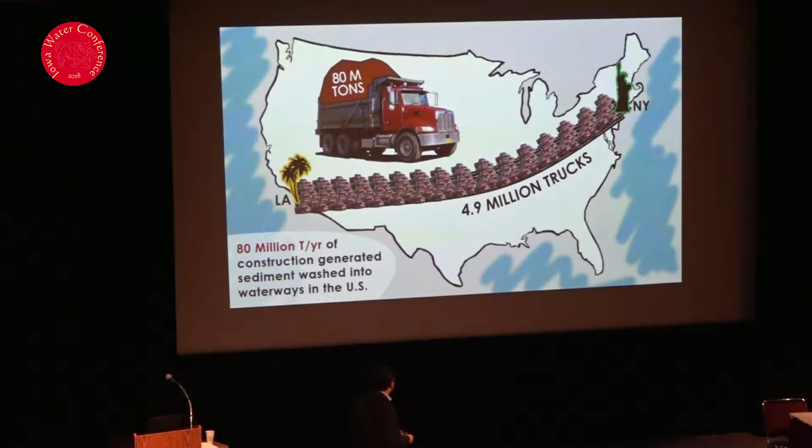Background, when we talk about erosion and sediment control here in the country, we have an estimate of 80 million tons of sediment that gets washed into our waterways each year, and this is just from construction sites. To put that into perspective, it's a huge number. 80 million tons would fill enough dump trucks to fill 9 lanes of highway between LA and New York. Try to picture that. It's a huge amount of soil, and obviously it has a huge impact on our natural ecosystems.

So in order to mitigate the issues related to erosion and sediment loss, we employ several different types of best management practices on construction sites to try to keep that soil in place and catch it before it leaves the site. Today I'll talk about a series of different practices we investigated in our research studies, but these are just a sampling of typical practices you'd see on a construction site. You have practices that go along channels, sediment basins designed to detain stormwater, inlet protection, perimeter controls, and they all have different ideas or ways of performing.

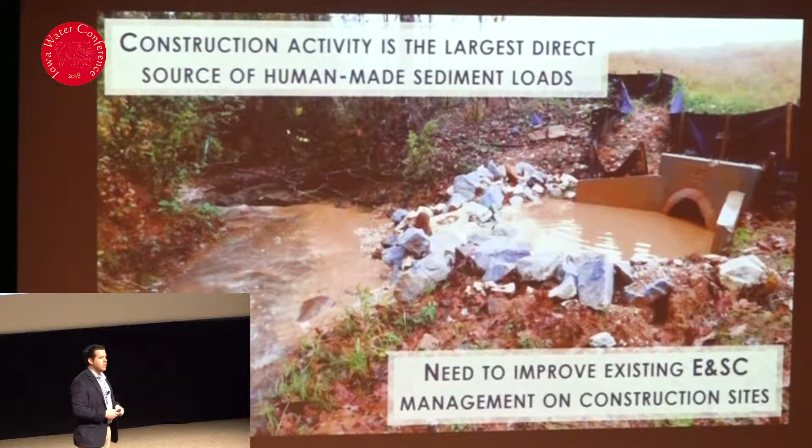However, even with these best management practices employed, we still have sediment-laden discharge that comes off of our sites, and you can imagine what kind of impact that has on the natural ecosystem in that waterway. In Alabama, our rivers literally turn orange after a rain event. So imagine anything trying to survive in that water after significant runoff. There's a need to improve the controls, the temporary practices used on construction sites.

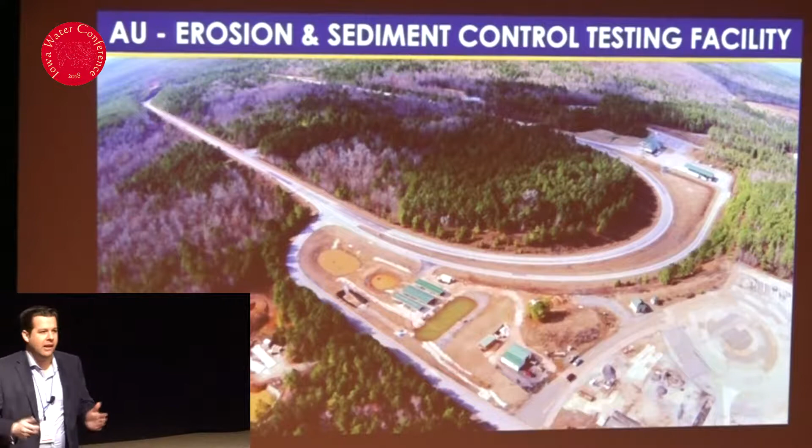At Auburn, we've got a really neat testing facility that we developed over the years. It's housed at the National Center for Asphalt Technology, NCAT, which is a unique world-class facility. It's a 1.7-mile oval test track, and what they do is accelerated pavement performance testing. They've got the test track broken up into different sections, and they run super weighted tractor trailers in circles for 18 hours a day.

At that facility, we've got about 2 acres dedicated to stormwater testing. We call it the Auburn University Erosion and Sediment Control Test Facility. The test facility was developed in collaboration with the DOT as they were trying to improve the practices they use on their construction sites.

The way the facility works is that we have this parking area up here for the asphalt test facility, and that collects stormwater and drains into this upper storage pond. We use that pond to pump flow into our different test apparatus, and that all gets treated in the sediment basin before being detained in our lower detention basin.

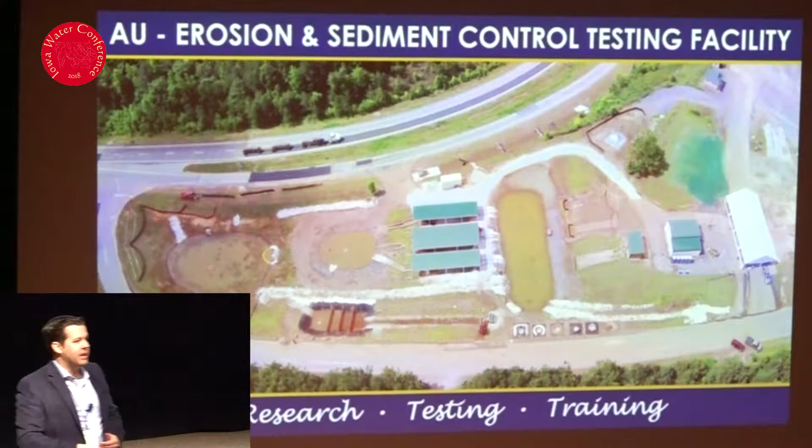Over the years, we've developed several different research apparatuses at the facility, looking at sediment barriers, erosion control blankets, channel testing, sediment basin testing, and skimmer testing. In addition to all of that, we also have demonstration areas we use for training. Every year we host live training events out at the facility to get contractors, developers, and inspectors all up to speed on how to properly manage stormwater on construction sites.

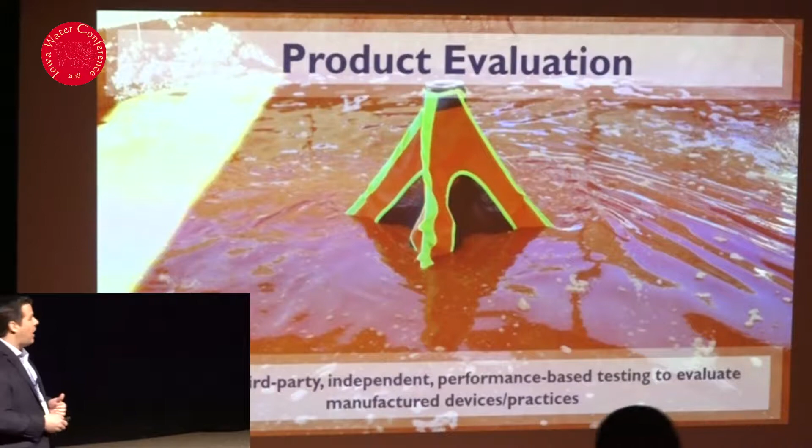So our 3 main areas are research. We also have product evaluation for products trying to get on the DOT's qualified product list. And then we also do the training, our hands-on training.

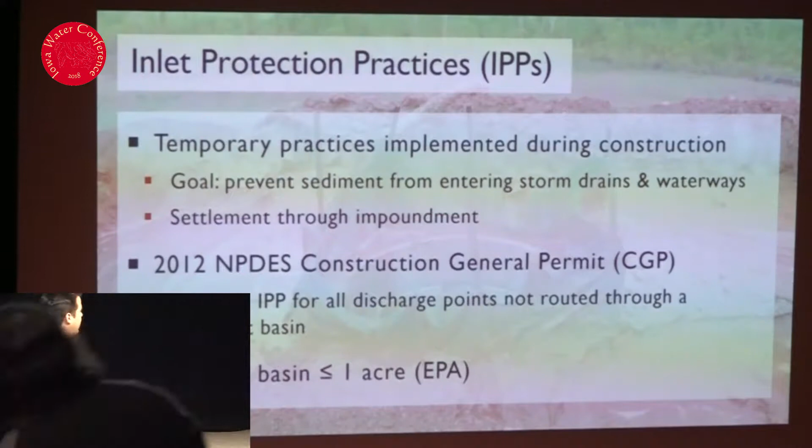The first project I'm going to talk about is one I worked on during my master's, where we looked at inlet protection practices and how to improve them to retain sediment around storm drain inlets. Inlet protection practices are required for all inlets that are not routed through a sediment basin. The idea is that you are impounding stormwater around the outside of the inlet and allowing soil particles to fall out through gravity.

Typically, the drainage area for these inlet protection practices is limited to 1 acre, so you shouldn't use them if you have more than 1 acre draining into the barrier. These are some of the common practices we looked at: silt fence, sandbags, wattles, straw-filled wattles, aggregate barriers, and we also looked at some manufactured products that have become popular in the industry.

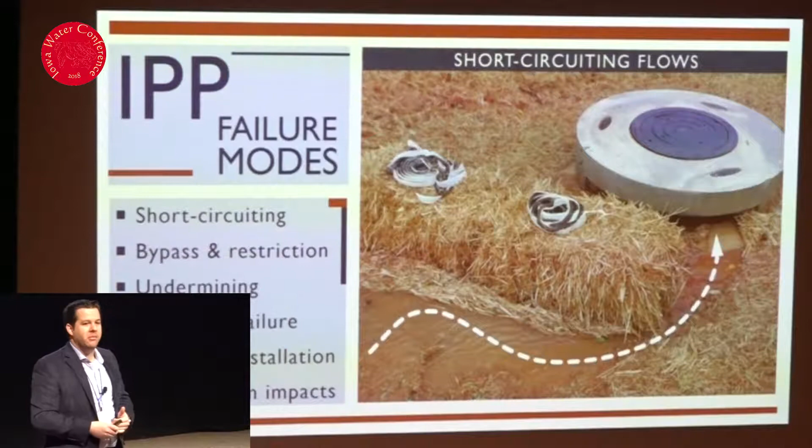These practices and products have a lot of different failure mechanisms. A lot of them have to do with the way they were installed. We deal with things such as short-circuiting, bypass around the practice if it's not properly installed, and undermining is very common. Structural failure is also due to poor maintenance and poor installation, and then there's improper installation, where the practice wasn't even trenched in. It just becomes erosion control theater, I like to call it.

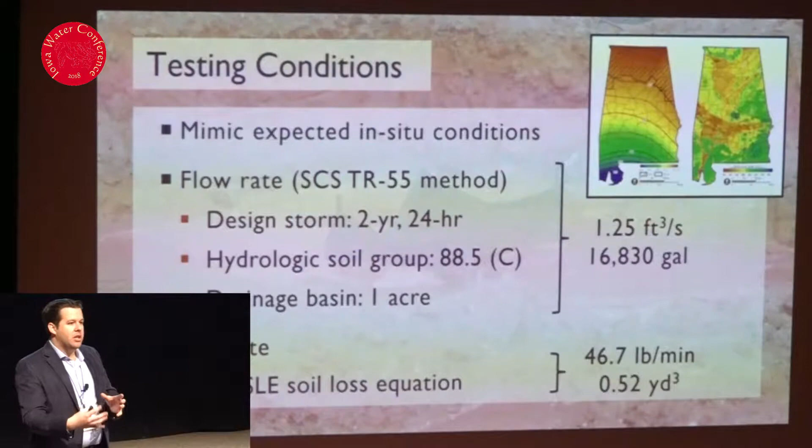In all of our testing, what we're trying to do is replicate field-like conditions. So we do a hydrologic analysis, a soil analysis, we look at our curve numbers, conduct a TR55 analysis, look at universal soil loss, and come up with a testing regime that mimics what these practices would be subjected to out in the real world.

So for this particular test, we were testing at 1.25 cubic feet per second for a duration of 30 minutes, and then we're introducing soil as well.

So we installed a test channel to mimic a highway median. It's 40 feet long, 20 feet wide. We've got a section that's plated in steel just to allow our flow to equalize and minimize erosion in that area. But then on the bottom half of the installation, we've got just a bare earthen soil area where we can install a practice the same way it'd be installed out in the field.

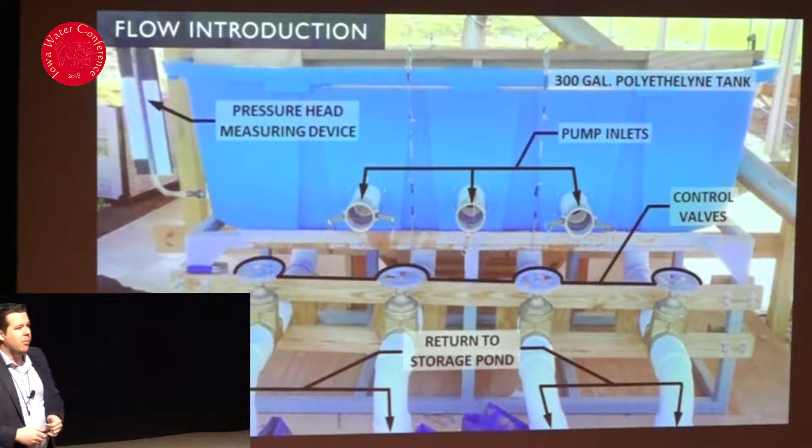We introduce flow into the system using a regulated system that we've come up with where we can control the amount of flow coming into the test apparatus, and then we auger in soil and meter it in at the rate that would be expected, the soil loss expected on the site.

We collected as much data as we could during these tests. We're looking at flow rates, water quality, taking grab samples upstream and downstream. We conducted surveys of the entire test apparatus before and after a test so we can account for how much sediment was collected and deposited upstream of the system. You can see the surveying here using a robotic total station.

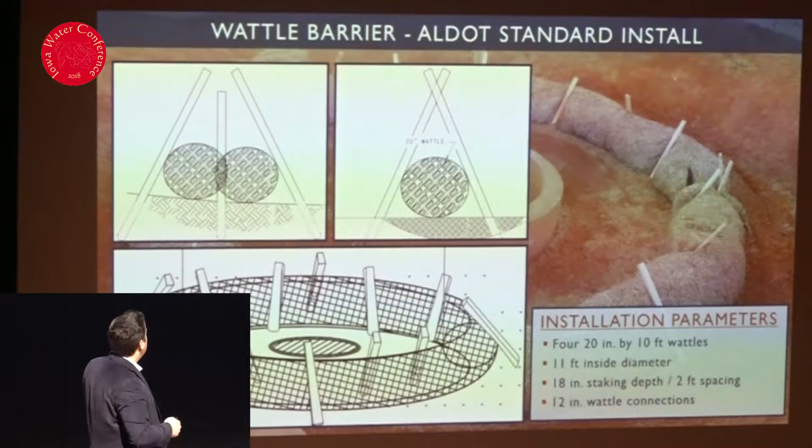And then we start improving practices. The way we went about this was that we would take the DOT's standard installation, test it to see how well it did, and then try to provide improvements if there were improvements that could be made. So this first installation here is a straw wattle barrier. It's constructed in a ring around the inlet, and you can see the standard DOT details here. Basically it uses a 20-inch wattle, installed around and overlapped about 12 inches, and then we use tee-pee staking to hold it down and secure it in place.

So this is a time-lapse video during testing. A couple things to point out here: these practices are intended to impound water outside of the practice or outside of the barrier. You can see there's very little impoundment occurring here, and you actually see a lot of that water flowing underneath the practice. If you look closely, you can see that wattle is buoyant, so the majority of the water is not flowing through, it's not flowing over, it's flowing underneath.

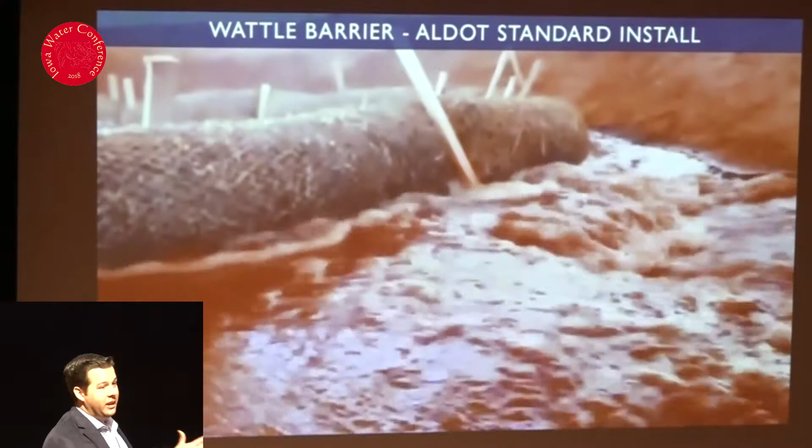So we looked at ways of trying to improve this, and we went through several different iterations, and this is the one that ended up working out best for us. Basically what we did was reduce the diameter of that wattle barrier and add a geotextile underlay. That underlay was to help reduce the amount of erosion and scour occurring under the practice.

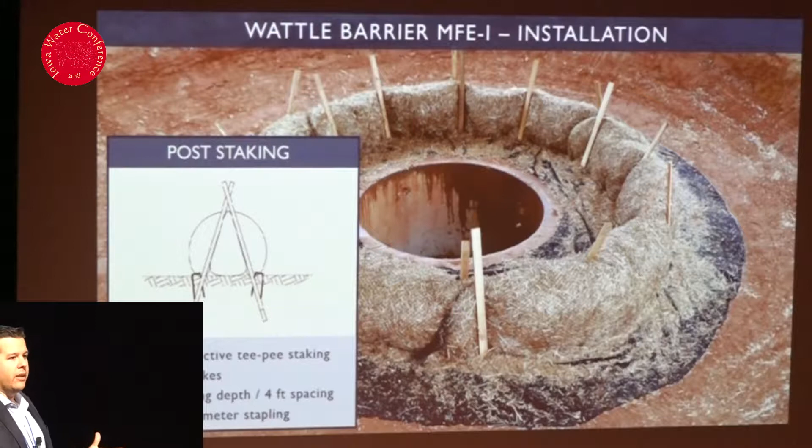So we reduced the diameter, and we increased our wattle connections. We were seeing a lot of short circuiting where water was flowing in between the wattles, so we increased the length of those to 18 inches. We also modified our staking pattern, where we're still using the tee-pee staking style - we call it a non-destructive method, we're not piercing the product - but then we also add these staples, on both the inside and outside of the barrier every 10 inches.

And what we saw was that with the staples, we were able to impound a lot more water outside of the practice and actually get it to overtop. You can see here that's our schematic that we came up with. We've got that 8-ounce geotextile underneath, and it's pinned all the way around, and then the installation is staked and stapled down.

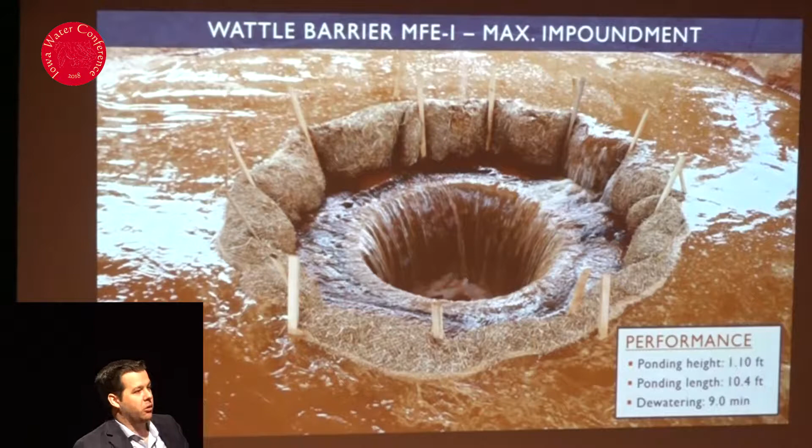One thing I did want to point out is that you don't see much flow actually going through the wattle. So don't think of these systems as filters. What they are is they create an impoundment, and that's where you get your treatment. It's those particles falling out of suspension by that reduced flow, reduced velocity.

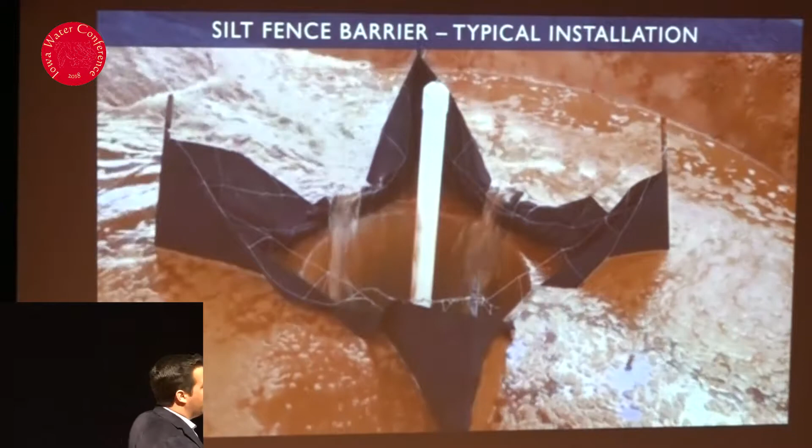Next, we looked at silt fence barriers. We installed it using the typical ALDOT installation method, a 6x6 inch trench. They use a wire-backed type silt fence, non-woven. We tested it out, and 2 minutes into our 30-minute test, this is what we get, which is actually pretty typical if you walk around construction sites and look at some of these barriers after a storm event. This is what ends up happening.

So we figured, okay, this is an easy fix. We'll just add more posts, right? So we added 4 more posts to the system, and 5 minutes in, we get total failure.

So we came up with a way where we had to actually stabilize and reinforce those posts a little better. We ended up doing that with 2x4s. This is after a series of maybe 5 or 6 different tests where we tried different materials, different post types, different configurations, and this is what ended up working out the best.

You can see here we're still using the steel T-post. We've included an underlay to reduce the amount of scour underneath. And then we've got this unique dewatering board here, which I'll show you a little bit more in a minute.

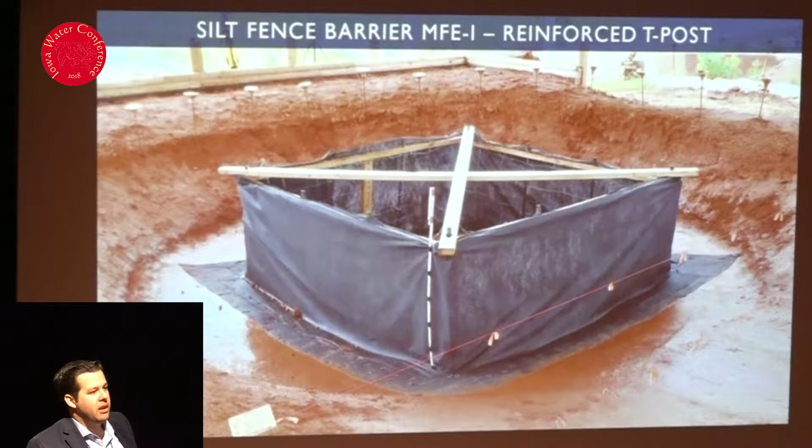Something neat about this installation with this cross bracing with this underlay is that now we can't trench in our silt fence. So instead of trenching it in, we pinned it. Here's a close-up on that. Every 5 inches, we put a sod pin. They're 6 inches deep, real easy to drive into the ground. Actually, the installation was a lot easier than creating that trench and burying our fabric underneath.

And then here's our dewatering board. This practice performed so well that we had impoundment around the barrier for more than 24 hours. So we had to come up with a way of safely discharging in a controlled manner some of that water that was impounded. You can see here during our time lapse, you don't see any deflection on the structure. From a structural standpoint, it performs very well. And then we're able to dewater that entire impounded area within 24 hours using that dewatering board in the back.

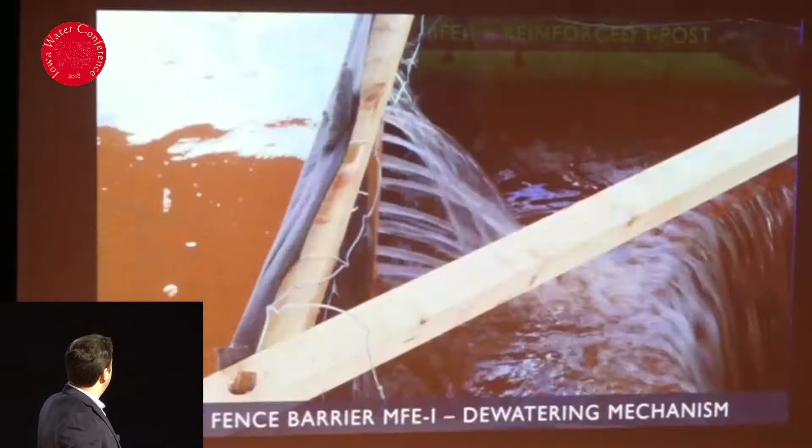Here's kind of a close-up looking at the dewatering board. And here it is after a series of tests. You can see a significant amount of sediment has dropped out back here.

One of the neat things that we saw with this practice was that you create such a large impoundment that sediment starts to settle out way upstream of the practice, to where you're not having a whole lot of maintenance right at the edge of the barrier. So it makes it easier from a maintenance standpoint.

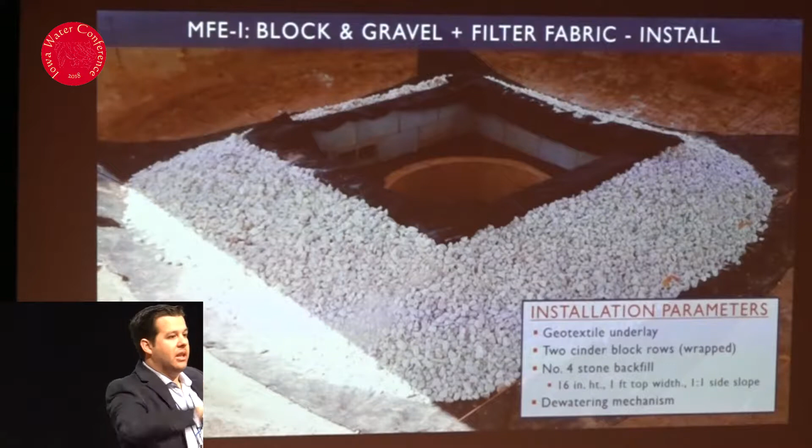We looked at aggregate barriers. This is a modified block and gravel system we came up with. We've got cinder blocks laid in a square pattern on top of a geotextile, and then we have a geotextile that's actually wrapped around the blocks as well, backfilled with number 4 stone. And then we have a dewatering mechanism in the back where we've overturned one of the blocks, cut out a quarter of the opening on the geotextile, and we've got a wire mesh there as well just to keep rock from washing in.

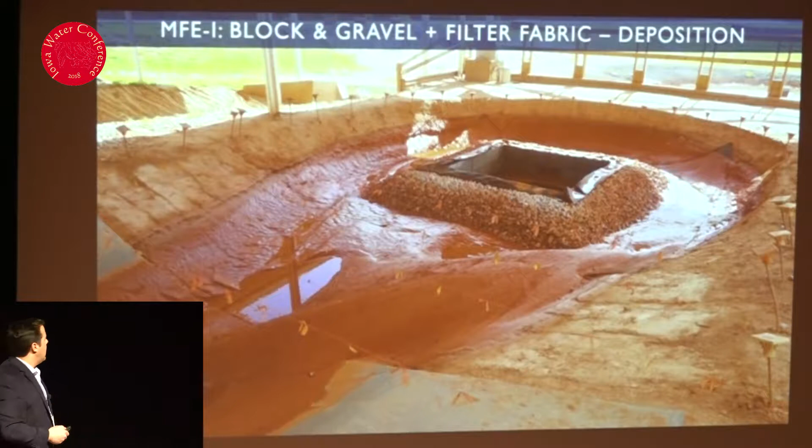And that performed very well as well. You get full impoundment, you get overtopping. Those are kind of the conditions that you want with these inlet protection practices. And then you can see the deposition that occurs, again, way outside of the barrier. It's where that hydraulic jump occurs on your flow. You can see that there's very little clogging of that aggregate because you're dropping those heavy sediments, those rapidly settleable sediments, out upstream of the practice.

We also got creative, and we wanted to see what else we could come up with that might be more innovative or might perform better. So this is a gabion flow system. We tested out basically 2 rows or 2 configurations of the silt fence, and we've cut in weirs to route flow through the practice. You can kind of see it working here. The water comes in through the front or through the back, and it's routed through the system and then deposited inside of the basin.

This time-lapse shows that as we turned on our sediment introduction, you can see that plume of sediment flowing through. The idea is that if you were to dose with flocculants, this would be a good way of doing it because you get good agitation with the aggregate and riprap placed inside the barrier.

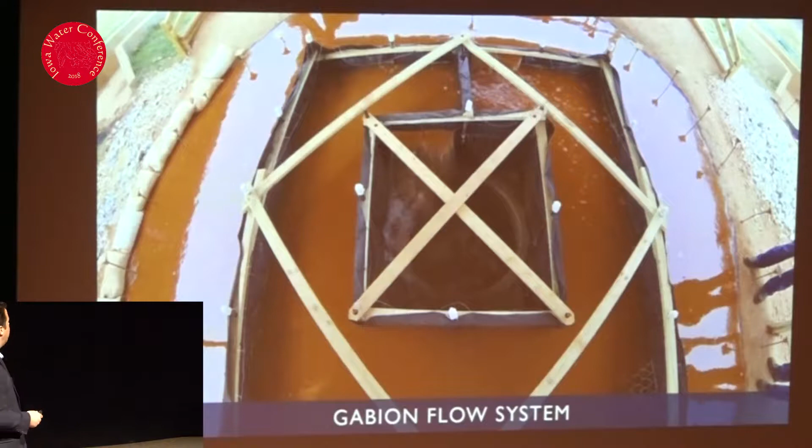To summarize some of the costs associated with the practices, we were interested not only in how well it performed from an installation standpoint, but also the cost to the DOT.

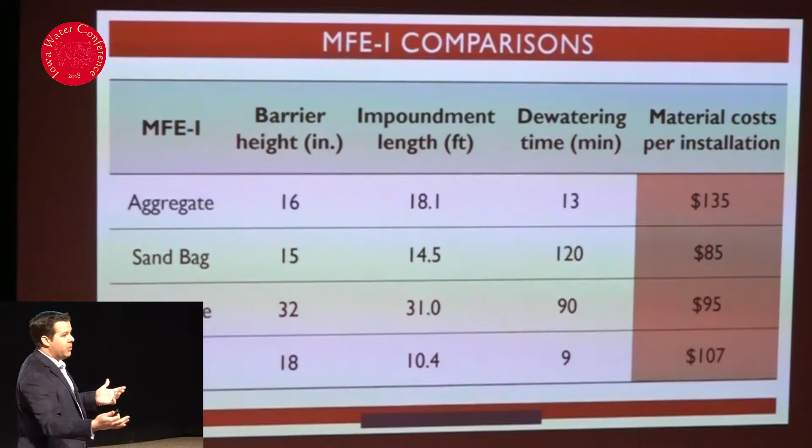From that standpoint, silt fence and sandbags were one of the cheaper options. I didn't show sandbags because it wasn't very exciting. But we also got very good impoundment with that silt fence, and that's just a function of the height of the barrier, which correlated to more sediment being captured around the system.

We looked at water quality, and interestingly, water quality was not improved by any of these practices. It did a very good job of capturing total solids and the heavy sediment particles that fell out, but from a turbidity and total suspended solid standpoint, we got no improvement. You actually see that upstream of the practice you have lower turbidity than downstream, just because of that earthen channel contributing additional sediment leaving the system.

We did see a decrease in turbidity after time if you detain that storm water. So after the storm is over, and you continue to impound that water and slowly release it, that's where you get the improvement in turbidity.

Some key takeaways from this project: adequate staking and bracing is required to get a well-performing practice. You need to have an overflow mechanism if you expect flows that exceed the capacity of the barrier, using spillways or weirs.

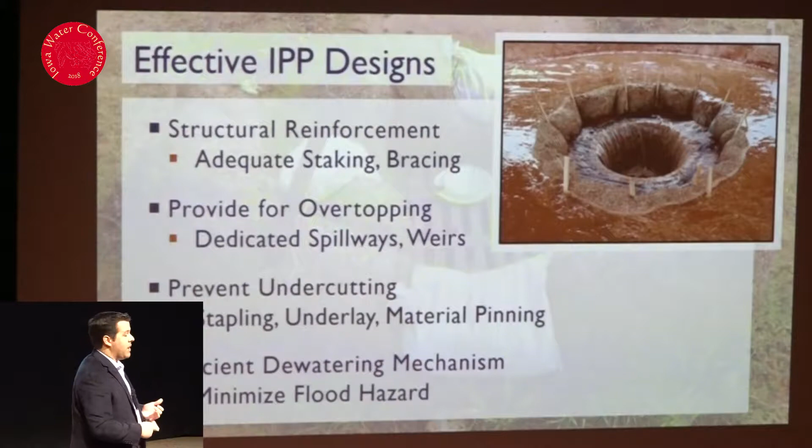Prevent undercutting — geotextiles came in very handy to help with the scour issues we were seeing. And having some kind of dewatering mechanism so we don't create a flood hazard around roadways and areas prone to flooding. Next I'll talk about a project where we looked at ditch checks.

Ditch checks or check dams are used in channels to slow the velocity of water. Pop quiz: are they an erosion control or a sediment control? Any takers? They're actually an erosion control.

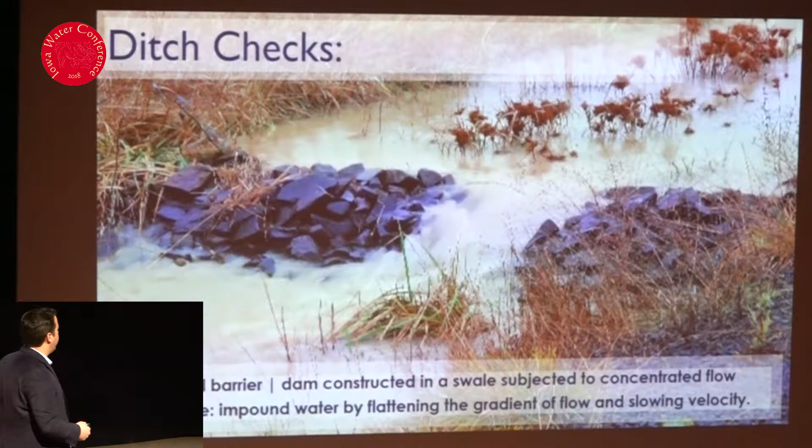The primary benefit with using ditch checks is that you slow the velocities down in the channel and reduce the scour and erosion potential of that flow. As a secondary benefit, slowing down water lets some heavy sediments settle out. They should be considered an erosion control before they're really considered a sediment control.

Our test channel is very similar to the inlet protection channel. It's about 40 feet long and about 20 feet in width, and again it just mimics a roadside channel.

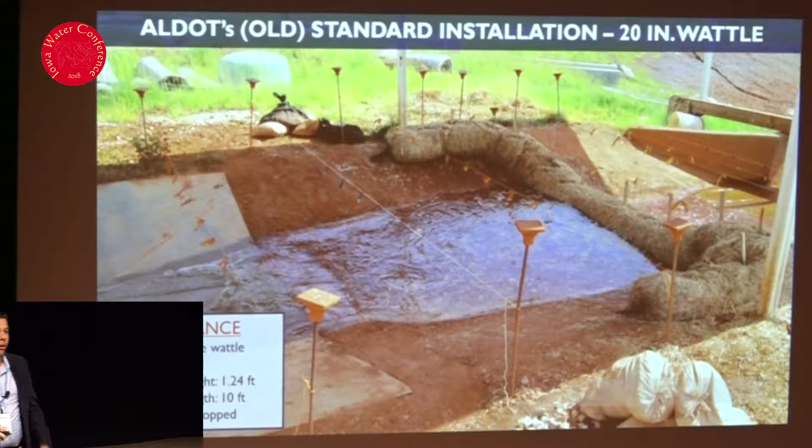We looked at straw wattles, using the old Alabama DOT installation where they would actually pierce through the wattle, and then we provided improvements to that as well. You can see the impoundment that system creates — very minimal, because you're getting a lot of undercutting and scour underneath the wattle as flows come through.

So we looked at ways of improving it, and sometimes our improvements created such a large impoundment that we would get failure of the system. There was a trade-off between how much you can actually impound upstream of the practice and how much the practice would be willing to take. These were always fun days out at the lab where you get catastrophic failure.

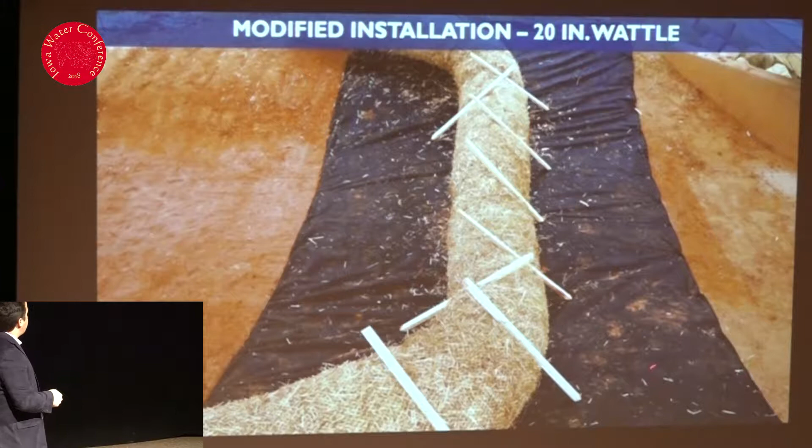Some recommendations we came up with for using wattles as a ditch check were to again include a geotextile — a very common theme to help reduce that scour. This is trenched in along the front end and then pinned down on the back end. With this staking treatment, we're not piercing the wattle, and we're providing bracing so that when water pushes the wattle, it digs it deeper into the ground.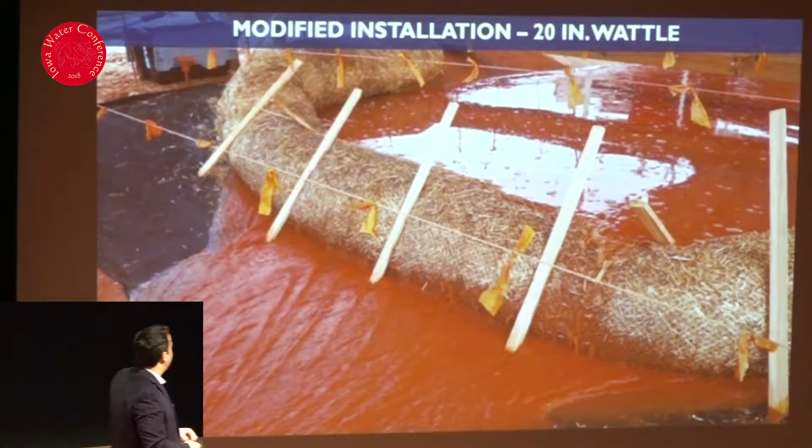One thing I want to point out is that a lot of these practices or products are sold as filters, and you can see from this picture there's not a whole lot of filtering going on. The water quality tests we do always show us the same result, where water quality is not improved after passing through the system. We do capture sediments upstream, but that's a function of the impoundment created, not of any kind of filtering or turbidity being treated through the system.

We looked at riprap as a ditch check. This was the standard DOT installation. We get an impoundment of about 15 feet.

We looked at adding choker to try to decrease the pore passage between the aggregate. That increased our impoundment to 20 feet.

And the last treatment we tested was using a geotextile fabric wrapped around the barrier. You can see it's pinned down in the front and just wrapped around the aggregate. And that impounded all the way up to the mouth of our setup, 30 feet.

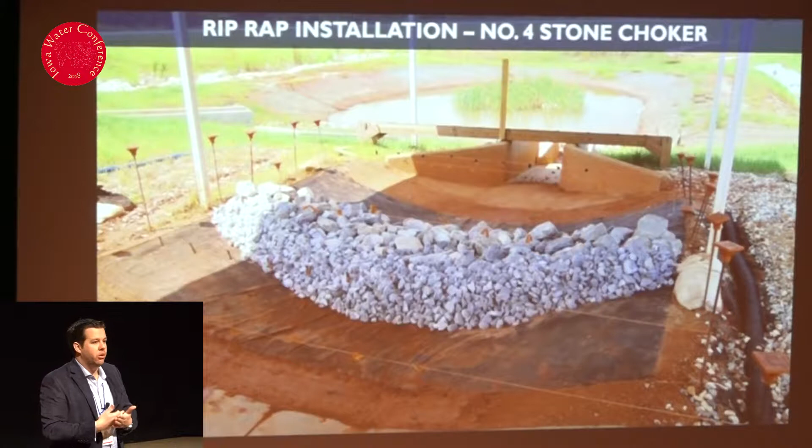So just by making those minor changes, going from a system where you don't have any aggregate to adding some kind of blockage to reduce the flow through the system, you can significantly increase the performance of the practice. We almost doubled the performance of the aggregate, going from 15 feet of impoundment up to 30 feet, the full size of our test setup. You're basically doubling the performance of that practice.

And that's a relatively easy modification to do out in the field. You add 10, 15 feet of a geotextile, staple it in, and leave it there. And the beauty behind this is that once that fabric blinds, it's very easy to take it off, remove some of the sediment that's accumulated, and either place it back on or replace it with a new fabric. So it makes it very easy from an installation or maintenance standpoint.

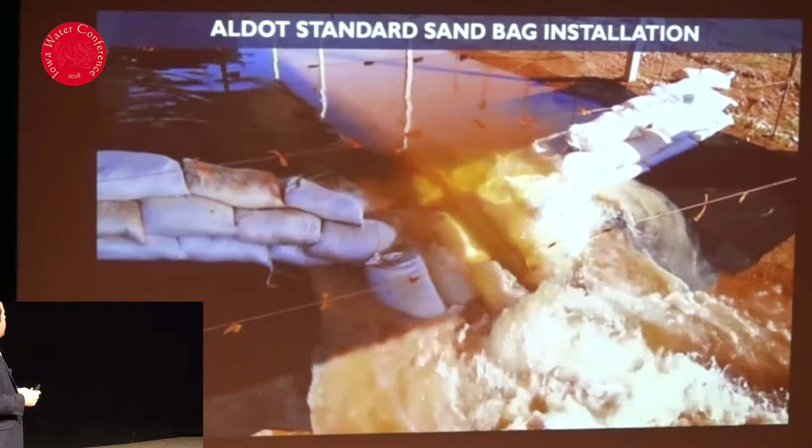Sandbags is another practice commonly used by the DOT. They use these in areas where they've already permanently stabilized with a concrete flume or concrete channel. Their standard setup didn't hold up very well. You can see here during one of our higher flow events, the bags become dislodged and you have catastrophic failure.

So we looked at ways of reinforcing that installation. Basically, the easiest system we could come up with was to just rotate that center bag to the center line. So instead of all bags running parallel, that middle row is now perpendicular to the bottom and top. That helps lock in the bags much better. We also have a spillway system set up so you can dissipate the energy of that flow as it falls over top of the practice.

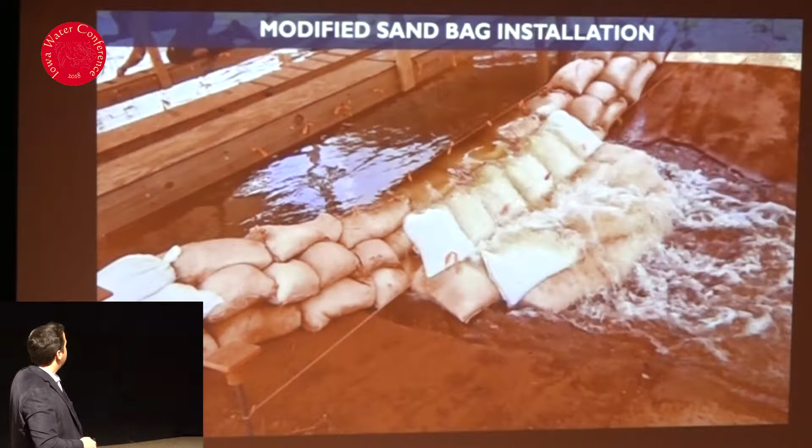One of my favorites was this silt fence installation that we came up with. Silt fence actually performed very well from a ditch check standpoint when it was installed correctly. But the issue was that you had to run your silt fence outside of the test channel or outside of your area to contain all that impoundment and prevent water from flowing around the silt fence ditch check. So we came up with a way to minimize the installation needs or the materials being used.

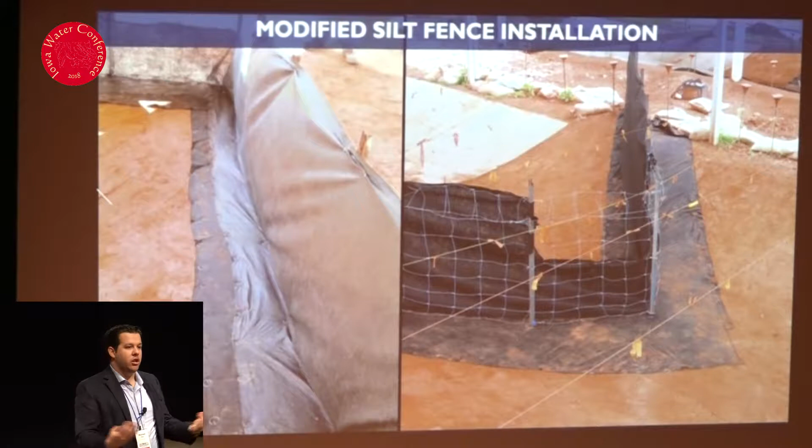That was by cutting a weir system into the ditch check. What that weir allows you to do is direct flow over the center of the ditch check and prevent any runoff from going around the edges.

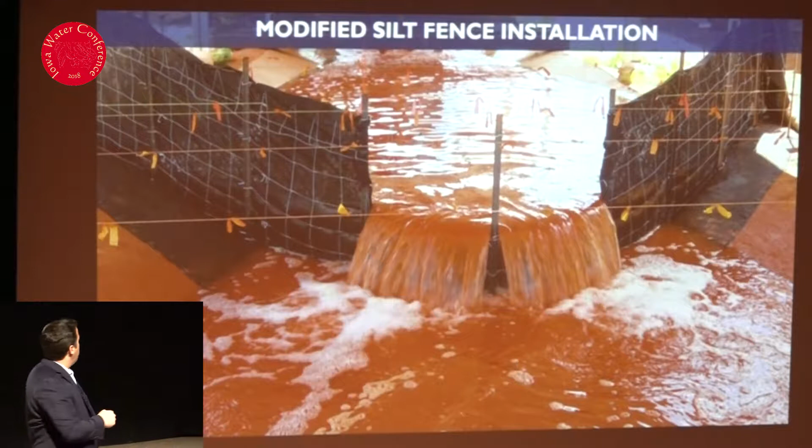You can see here again we've done the pinned installation where we have an underlay, and then the silt fence on the front side is not trenched in but pinned in. You can kind of see the pinning system here. So it's an underlay with the silt fence fabric pinned on top. You can see that during testing you get that flow to go through the center. We've cut the weir here so that it's no higher than the highest point on the practice, so you don't get flow short-circuiting and going around the practice.

We also wanted to see how this would perform from a longevity standpoint, so we ran several tests over a series of months, about 6 or 7 tests. You can see the deposition upstream of the practice, with no maintenance in between our test runs. From our survey, we got about 92% or 91% capture upstream of the practice. We did have some scour on the back end as flow starts to go through the practice and pick up additional sediment.

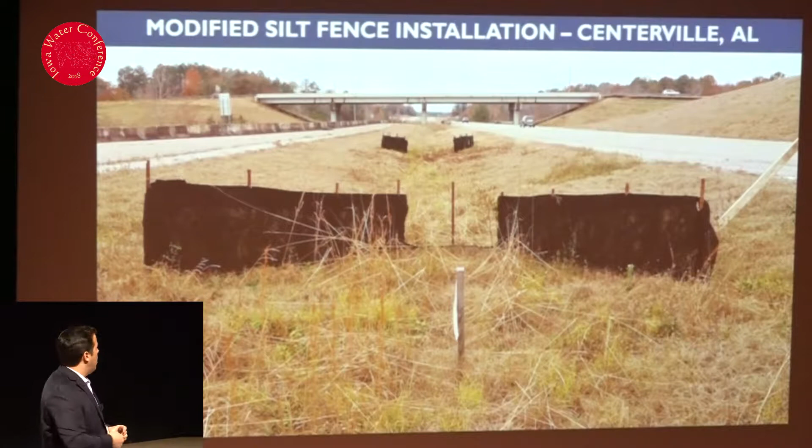The DOT has employed a lot of these practices as their new standard. So this is what the ditch checks look like now on active DOT construction sites. You can see some of these installed, hundreds of them, along their roadway improvement projects. So far they've been performing pretty decently.

So with the ditch checks, underlay and staples increase performance. Choking pore passages doubles the performance of that aggregate ditch check.

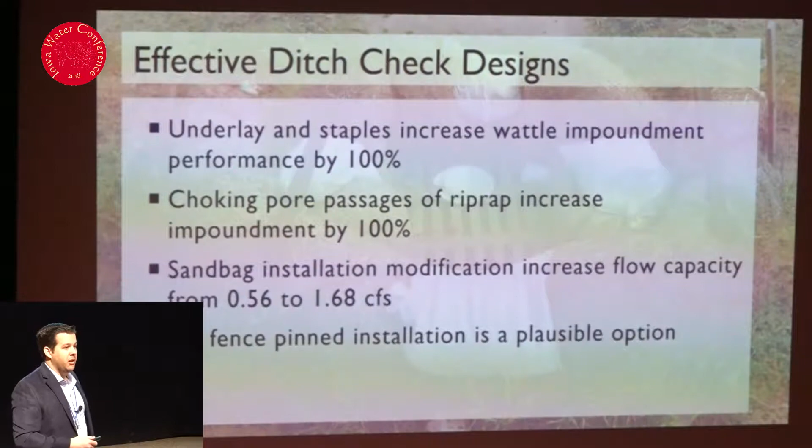The sandbags were able to sustain the higher flow rates just by changing the orientation of the bags and adding the spillway. And the silt fence pinned installation seems to be a pretty plausible option that's actually working.

One of the newer tests we've been doing at the facility looked at sediment barrier practices. These are practices installed around the perimeter of a construction site. Typically we think of it as silt fence, but it can include wattles, three-dimensional flow systems, or aggregate. There are many different ways around it.

With these practices, we see a lot of the same common failure modes: fabric is unearthed, we get uncontrolled discharge going through failure points on the fence, sediment bypass around an installation, impoundments that overwhelm the installed practice, undermining, and overtopping. Those are some of the common failures which I'm sure you've all seen before.

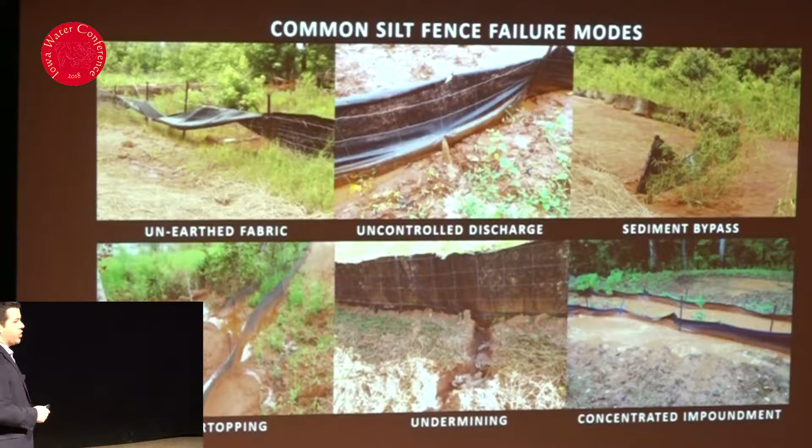The test apparatus we developed was meant to mimic construction site layout, so we went with a system that's 20 feet wide. This is an aerial view of it. That allowed us to install the practice in this earthen section, the same way it would be installed out in the field.

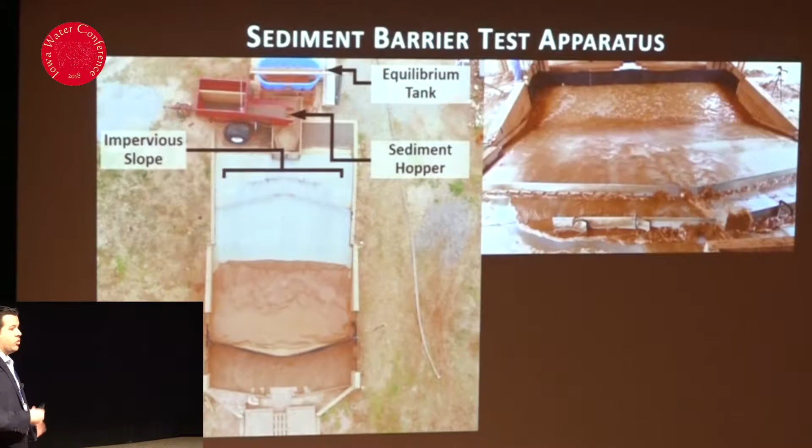We've got a tank to introduce flow and a sediment hopper to introduce sediment and meter it in. That flow and sediment gets mixed and introduced through this sheet metal area where it's dispersed evenly across the width of the installation. Then you see our installed practice down at the bottom, subjected to these sheet flow conditions.

We have access doors at the bottom that let us remove and install something longer. So if we wanted to look at, say, a sliced installation method, we can easily do that—remove the doors and have a tractor come through and slice in the silt fence like it would be done on site.

Recently we've added a pole barn to keep normal rainfall events from interfering with our experimental tests. So we went through a series of different tests at the facility, looking at different products and practices, and I'll show some highlights from those tests.

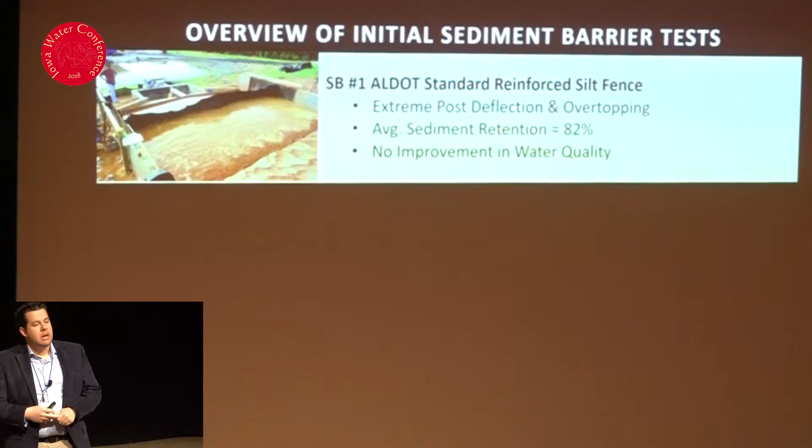The first system we looked at was the standard DOT silt fence. It uses 10-foot spacing between steel T-posts, has wire back reinforcing, and uses a non-woven silt fence trenched in 6 inches by 6 inches. With that, we saw a lot of deflection on the posts, overtopping, no improvement on water quality, and sediment retention averaging about 82%.

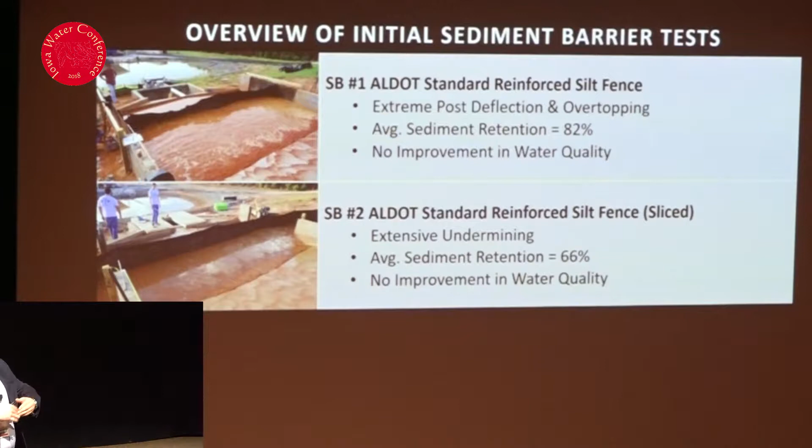We looked at a sliced installation—same fabric, same backing, but installed with a tractor implement rather than typical trenching. We removed the doors on the sides and installed it in a smile configuration where water impounds at the bottom. With that installation we saw extensive undermining, which we weren't expecting—we thought slicing would work better since it's marketed as causing less disturbance without a trench. Sediment retention was about 66%, with no improvement on water quality.

We also wanted to see what our neighbors were doing. Georgia doesn't use a non-woven fence, they use a woven silt fence, so we tested that. They use wooden posts instead of steel posts, and it performed pretty well. It did have some minor undercutting, but sediment retention was much higher at 90%. Again, though, no improvement in water quality—that's still an issue.

Good question? I didn't quite catch it. Something about this.

It's not just the posts that differ between the Georgia and Alabama installations. The Georgia installation uses a woven fabric, and the post spacing is much closer—about 4 feet, versus Alabama DOT's standard 10 feet. Structurally that makes a big difference. But other than the fence and posts, it's installed exactly the same way, with a 6 by 6 inch trench.

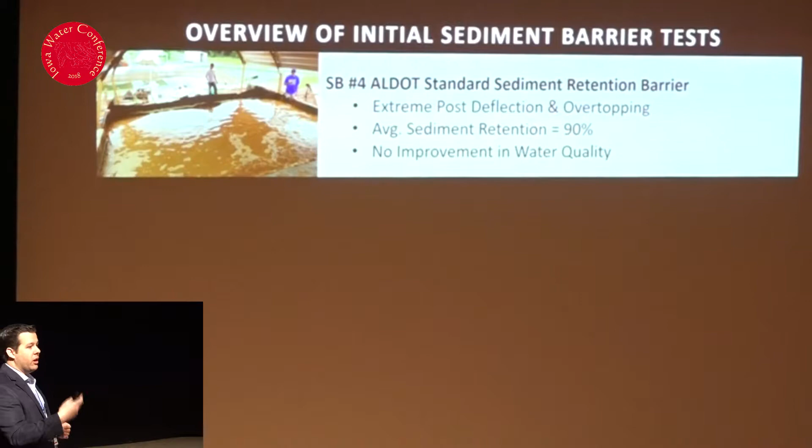We looked at a sediment retention barrier, another standard practice in Alabama. Basically, it's two rows of silt fence filled with straw mulch in between. That did all right from a sediment capture and retention standpoint at 90%, but we still had a lot of post issues where it was failing from a structural standpoint.

We looked at a barrier, sediment retention barrier with a flocculant. Here there's no fence, no silt fence, just straw mulch laid out with granular flocculant sprinkled on top. No impoundment, obviously there's no fabric there to hold that water back. We do get some sediment retention upstream just by slowing down the water with that straw mulch, and our turbidity reduction is where we start seeing some improvements when you're adding flocculant into the system. So about a 70% reduction in turbidity.

And then we've also looked at straw wattles as a sediment barrier. With the straw wattles, significant undermining, very poor performing sediment retention compared to the other practices, 82%, and then no improvements in water quality.

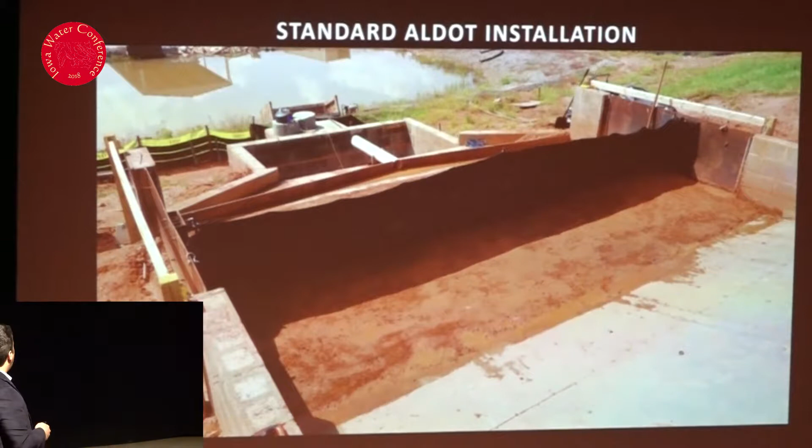So I want to focus on how we took that ALDOT sediment barrier to the next level by improving the installation. With these tests, we go through a series of iterations, but we always start out with the DOT standard install. It's a 32-inch fence, 10-foot spacing on steel T-posts, with a 6 by 6 inch trench along the bottom, and to keep that fence suspended, there's C-clamps or C-rings installed along the top on 2-foot spacings.

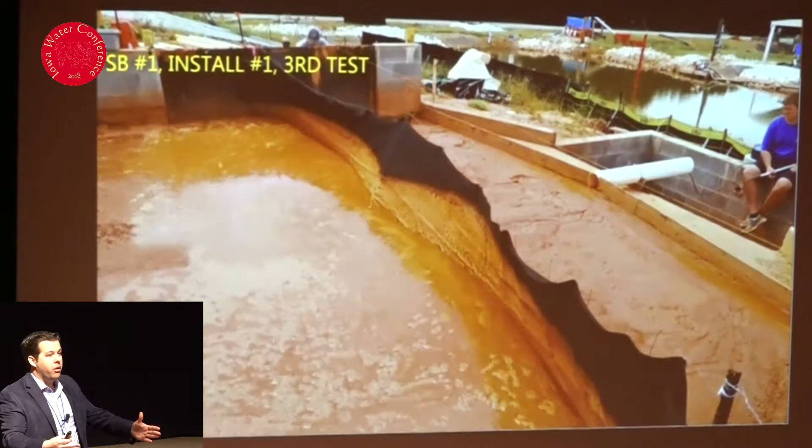So we do a series of tests, running 3 tests to simulate longevity performance. This is the third test, and you can already see some sediment that's caked on from the previous test. You can see how flow just overwhelmed the fence completely, and that fence ends up overtopping, and that mass release of sediment-laden stormwater creates a big issue downstream.

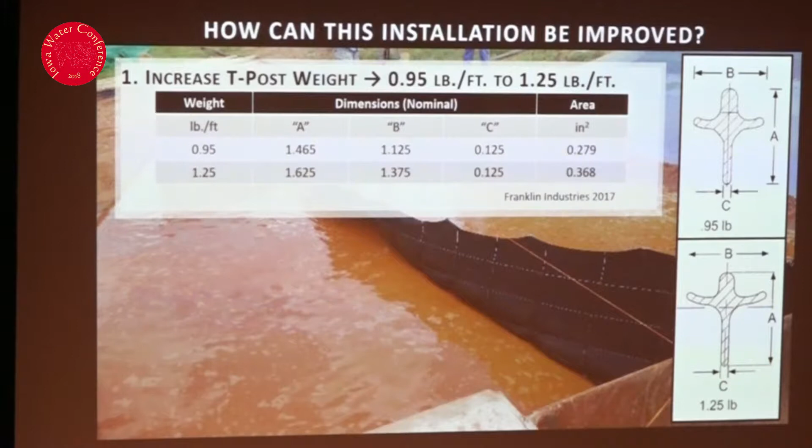So we went through several iterations to see what we can do to improve the way these installations perform. We looked at several different treatments. First was the T-post—there are different options available. Commonly in the industry we have 0.95 pound per linear foot density posts, and we've got 1.25 pound per foot posts.

We wanted to see if that made a difference, testing different iterations using the two posts. We also wanted to see if reducing the T-post spacing, maybe adding an additional post at 5-foot increments instead of 10-foot, would provide improvement. We looked at reducing the fence height, so maybe we don't need to impound all 32 inches—maybe we can reduce it down to 24 inches. And lastly, we looked at changing the way we were trenching in our silt fence.

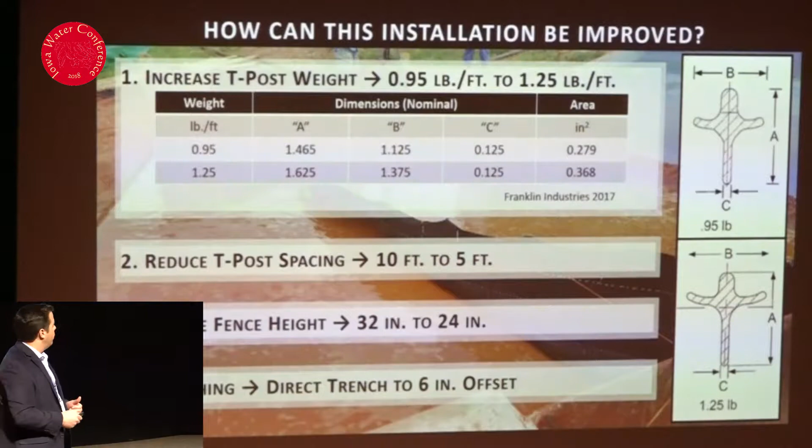With all those different treatments tested, this is the one that ended up outperforming all of them: we've offset the trench. Instead of trenching in right where the T-posts are at, we're actually moving that trench upstream 6 inches. So now we're not disturbing the area where the T-post was installed, and that's being installed in native ground rather than at the side of the trench.

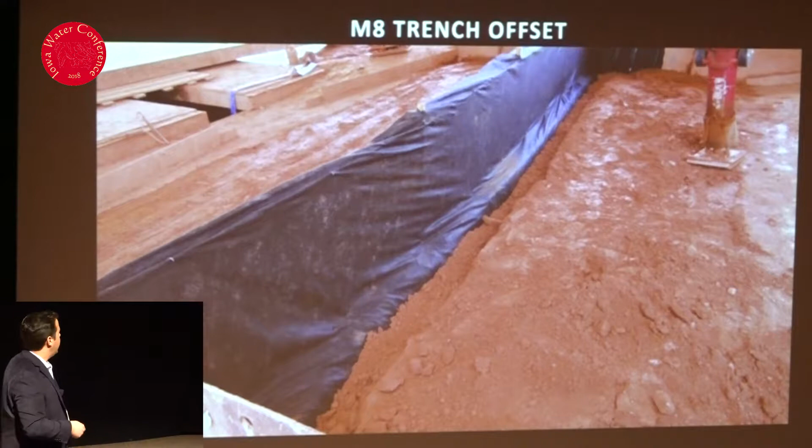Then the fabric and the wire mesh is installed, and you can see now you can use a piece of equipment to roll up and down and get that trench compacted a lot better than you would if it was right at the base of the silt fence, because you would damage the fence otherwise. You can see the T-post—now you've got an additional T-post, so we've got 4 posts for this particular installation. You can see how nice and clean that installation is, because you're able to work around the practice without disturbing the area where the trench is at.

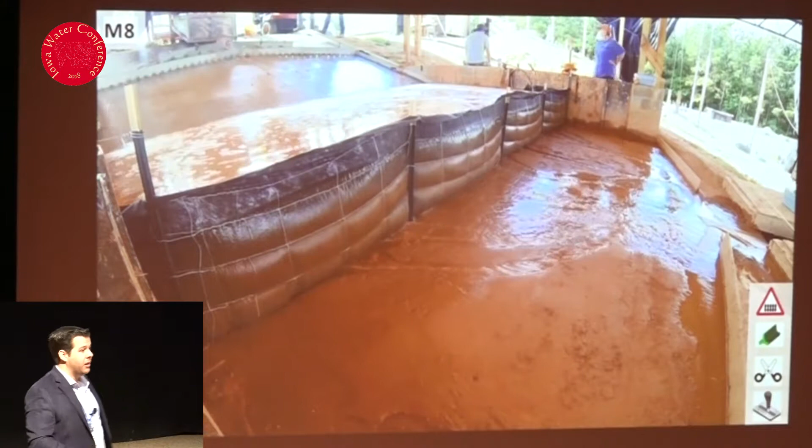This is the third test, the same test you saw with the failed practice. You can already see some of the previous silt on the fence from the last runs, and with this there's almost no deflection on the post—that fabric holds up very well. You've got some minor undercutting at the areas of the post, where flow goes through and falls out the bottom, but nothing compared to the previous test. From a structural standpoint this worked out a lot better, and our post deflection was 0.18—almost unnoticeable compared to the previous test where you had that catastrophic failure.

From a sediment capture standpoint, 93%. So overall, this is what we've recommended to the DOT for them to implement as their standard installation.

Lastly, I was going to talk about my PhD work, which is looking at sediment basins, which are very common in Alabama, and some of the innovative testing that we did to improve the performance of those practices. Sediment basins are temporary practices installed on construction sites. The idea is you're funneling all the storm water to these basins and allowing that water to sit there for a significant amount of time, usually 48 to 72 hours, allowing the soil particles to fall out of suspension.

So the idea is that if you've used all your erosion and sediment control practices correctly upstream, your sediment basins act to just polish the storm water and treat that turbidity and the TSS that we're worried about.

The standard setup for a sediment basin in Alabama is that it's broken up into 4 bays using coir baffles. What those baffles do is as water comes into the system, it slows down the water, reduces the amount of turbulence, and allows you to use the entire effective width of the basin.

At the back end of the basin, we've got a surface skimmer. That skimmer is floating at the surface of the water, discharging from the top of the water column, which should be the cleanest, should be the most treated, as your heavier particles have fallen out to the bottom.

And then up in the channel leading into the basin, we've got a forebay, and we've got a flocculant introduction, which is optional on DOT projects. But if flocculant was to be used, it would be introduced up in this area where there's still time for it to be agitated before it comes into the basin and while it's still in the basin.

And another feature is we've got this spillway down at the bottom where excessive volume can safely pass through without creating an issue in the sediment basin.

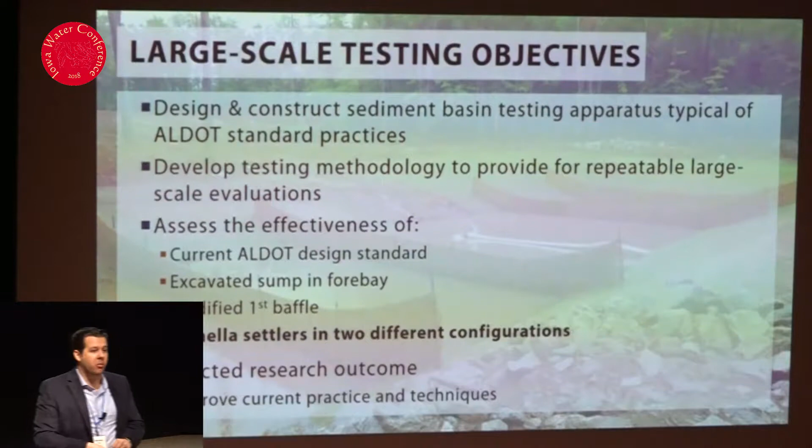We also wanted to test this lamella settler idea, which is used in wastewater treatment. We wanted to see if we could apply it for stormwater treatment as well. The whole idea at the end was to improve the current performance and provide the DOT with an enhanced sediment basin design.

So like our other practices, we devised a mechanism where we can introduce flow and sediment at a controlled rate. Here we're mimicking the volume from a 2-year, 24-hour storm, and we're condensing it to 30 minutes so that we can get high flow rates and fill that basin in a very short time period.

So we have a channel that leads up to our basin where we can test out our forebay setup before getting into the sediment basin itself.

When it came to collecting data, we really instrumented the sediment basin with as many things as we could. The idea was to learn as much as possible as far as turbulence was concerned in the basin. For water quality, we had grab samplers that allowed us to take samples back to the lab and look at.

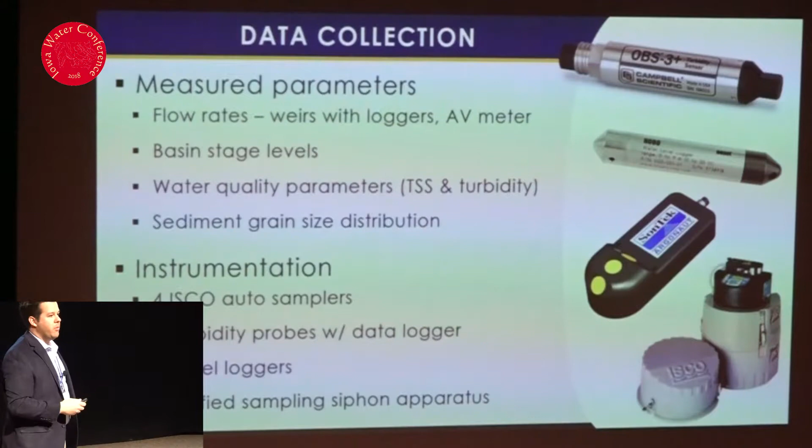We had level loggers that gave us an idea of the filling and storage of the basin. And then we also had data loggers with turbidity readings, so we could take turbidity at the different bays and see how treatment was occurring or progressing through the basin.

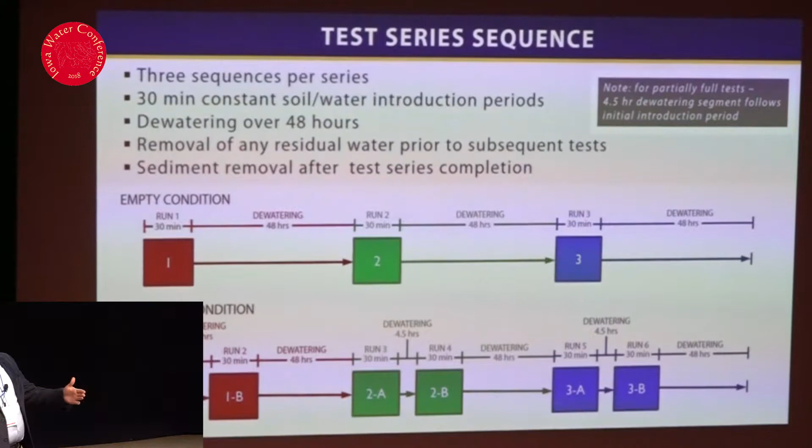The way we devised our testing schemes, we had two different test systems we looked at. The first is what we called an empty condition. Essentially, we'd have an empty sediment basin, fill it up with flow, and allow it to dewater over 48 hours before we ran the next test. We would do those tests 3 in a row to simulate a longevity type of test.

Our second type of condition, which I'll only show today, is our overflow condition. We wanted to see what would happen if we had back-to-back storm events, with one storm event overflowing the basin or exceeding the volume capacity and causing water to flow through the emergency spillway. Those were replicated 3 times back to back to back, again to learn from those experiments from a longevity standpoint.

We did all of the phase 1 testing, where we were looking at the coir baffles, our excavated sump, and our forebay. That wasn't a whole bunch of exciting, so I'm going to focus on phase 2, which is where we looked at the lamella settlers.

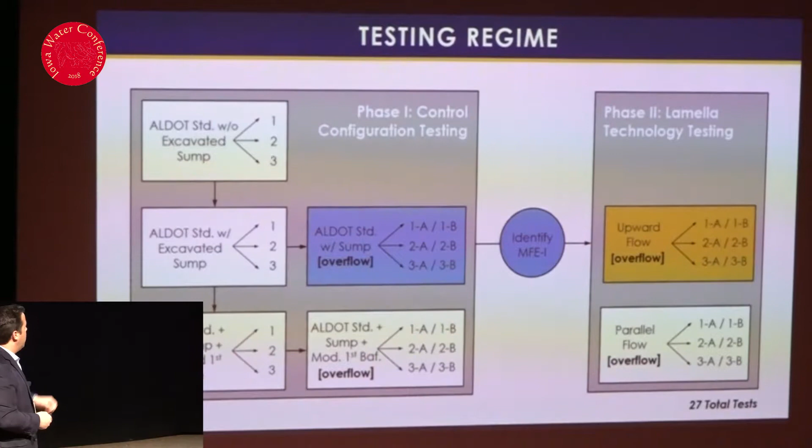We looked at them in two different configurations, which we call an upward flow and a parallel flow. The way lamella settlers work is that the whole idea is you're reducing the height a soil particle has to fall before it gets captured. These are used in wastewater treatment, and they provide laminar flow, hence the name lamella, where there's very low turbulence that allows particles to fall out in an ideal setting.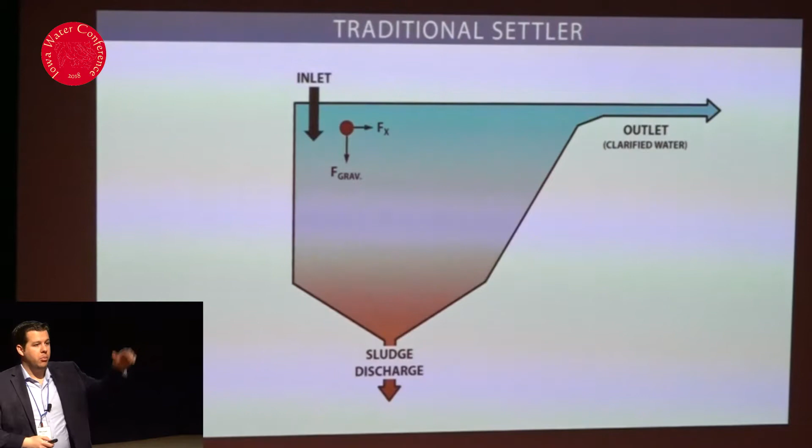From a schematic standpoint, if you think about a traditional clarifier or sediment basin, you have an empty tank with a height where a soil particle is forced to fall. That particle has flow pushing it out, and gravity acting to weigh it down, bringing it towards the bottom of the tank. So that particle has to fall out the entire height of that tank.

In our sediment basin, we're talking about 3 to 4 feet of impoundment. In a clarifier, it might be 8 to 10 feet. As several particles come in, you slowly start having a layer of sludge built up at the bottom, and then some particles end up escaping through the outlet.

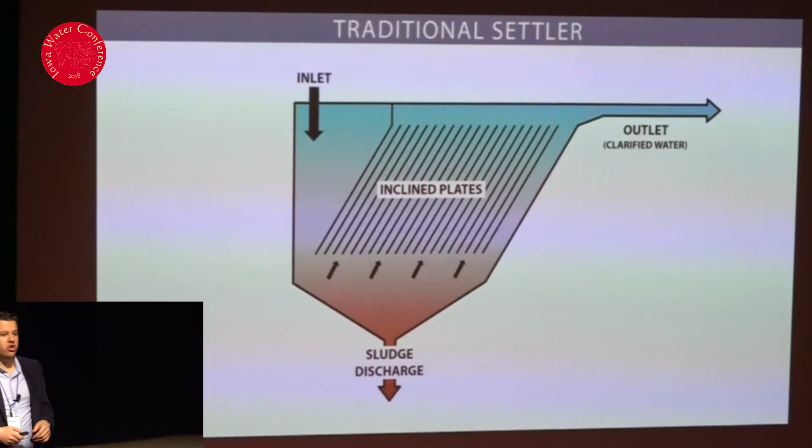The lamella system creates a series of inclined plates at about a 55-degree angle. Flow is forced through the plates by coming in through the top and flowing through the bottom of the plates before it's discharged out the top. To blow this up a little, if you look at just two plates...

You have a soil particle being forced up and out, and gravity still acting to bring it down. Eventually the trajectory of that soil particle takes it to where it hits that subsequent, parallel plate, and it ends up sliding down and being captured at the bottom. So you get a wedge of clarified water going out the top and a wedge of sediment or sludge caught down at the bottom.

The idea here is that you're taking the entire height of the sediment basin or clarifier and reducing it down to the distance between the two plates, which is 1 to 2 inches. So you're going from 4 feet down to 1 to 2 inches.

The idea is you can capture more sediment at a faster rate. That could reduce the amount of time you have to detain stormwater if you can treat it quicker—instead of maybe 48 to 72 hours, we're down to just a matter of a couple hours.

It might also help us reduce the footprint of these basins. Sediment basins are very expensive to construct because they take up a lot of right-of-way and a lot of space. Well, if we can optimize the way we use that space, maybe we don't need all of that room.

So we went out and built some lamella plates, and we probably weren't the most efficient and effective at building them the first time—we used a whole bunch of metal to do it, and they were pretty expensive. But the idea here is if we can show that they work, we can then worry about trying to optimize the design and constructability of the plates.

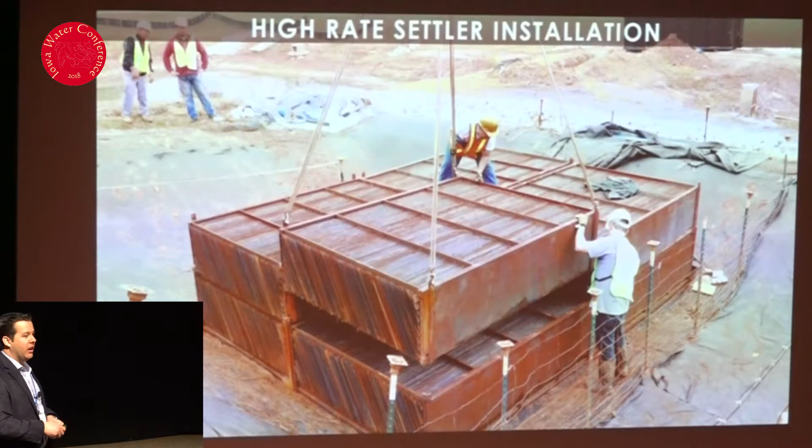The way these are installed, they're going into bay number 3 of the basin, so flow would be forced this way, with our skimmer back here in bay number 4. Once it's all set up and installed, we put in these wing walls to force all the flow to go through the plates. Down at the bottom here, there's an opening where that's the only way water can come in, and then it's forced out the sides.

This is what we call our upward flow, but it's really more of an up-and-out-the-side type of flow. With sediment basins, you can't always control the amount of water in there, so you can't get that ideal flow up through the top—so this was the compromise we came up with, just to come out the sides.

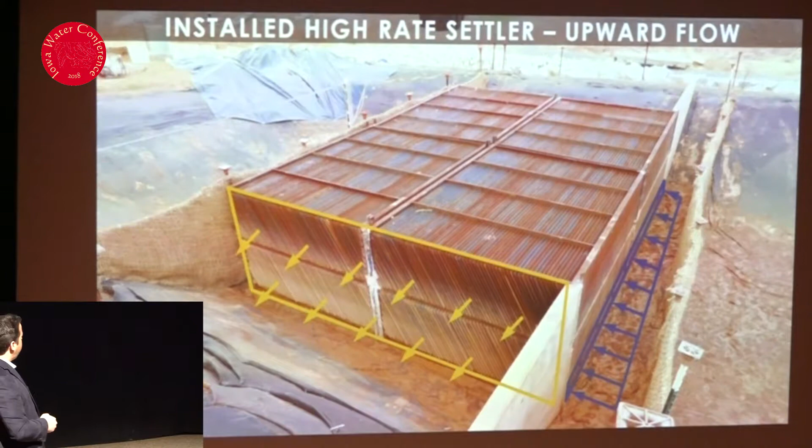Where we really start seeing improvements is when we start looking at our turbidity data. I mentioned we had turbidity probes in each one of our bays within the basin. So what we looked at was the difference in turbidity between the first bay, the mouth of the basin, and the fourth bay where our skimmer is located, our discharge point. So anything we do in between is a treatment mechanism.

So we have two plotted lines here. The blue line is the standard sediment basin configuration, the red line is the lamella in the upward flow configuration. What I've done here is I've divided the data for bay 4 by bay 1, and that gives you an idea of treatment efficiency. Anything lower than 1.0 shows you that turbidity in bay 4 is less than turbidity in bay 1. If it's higher than 1, your turbidity is actually higher in bay 4 than it is in bay 1.

So this is that turbidity ratio on the y-axis, and on your x-axis you have time. We looked at the first 12 hours. Where you see these, that 1.0 kind of divides up the data between higher performing and lower performing. These two spikes you see, that's during our inflow period. I mentioned 30 minutes of inflow, that's where those are occurring.

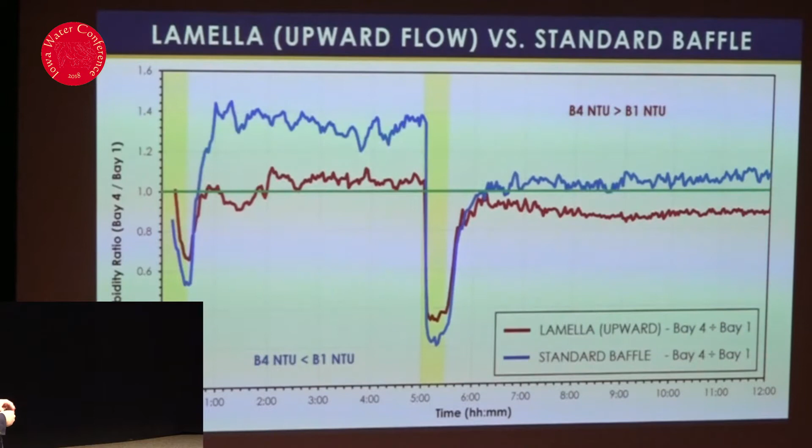So you actually see the biggest difference between treatment, or between turbidity, during those inflow periods where flow is being forced through the basin. And then you can see that the lamella system is actually lower than the standard setup. That gives us an indication that it's outperforming the standard setup.

We did want to see if we can improve this further. So we took our setup, we removed all of our plates, and we rotated them 90 degrees. The idea here is that now flow is going parallel to the plates. You still get the advantage where those particles have that trajectory where they're hitting the plates and settling out. But now you're increasing the effective width, or the surface area, or the cross-sectional area where flow is flowing through, so you're reducing the velocity of that flow as it's going through, and you're getting longer residence time within the tanks.

So we put those tanks back in, and we constructed our wing walls, and now we've got that real large opening where water can flow through. So here's that setup. We caulked and sealed all of our open areas along the tanks to make sure we didn't have any short circuiting.

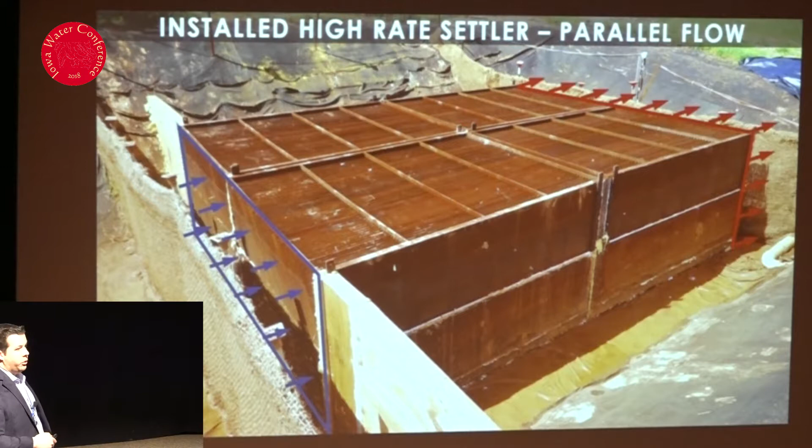We've got this opening at the front where flow is coming through, and the only way out is through the back of the tank. So it has to go through the entire tank system, which is 16 feet long. There's a good amount of time for that storm water to flow through the tanks. And then our skimmer is located in the fourth bay back here.

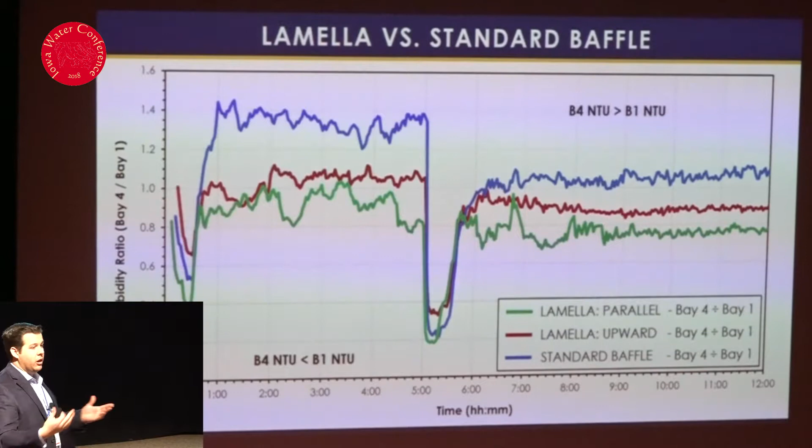So we plotted the data again. We wanted to compare it to our two previous tests, our standard setup and then our upward flow setup. So you're seeing the parallel flow here in green, where again that 1.0 breaks down the difference between bay 4 being higher or bay 4 being lower than bay 1. So then we can start making some conclusions where we can take the average data during those time frames and look at trends. In this case, we kind of clean it up and get a general idea of how things are performing, and you can see again the parallel flow outperforms the two others.

And then we wanted to compare it to our standard. So we said our standard, that blue line, was going to be 1 -- we'll just call that 1 and divide all of our data by that baseline. So that's kind of what we see here, and that allows us to draw efficiencies. Compared to our standard, the upward flow ranged between 14.5% to about 23% more effective. And then our parallel flow was up to about 32% more effective than the standard flow.

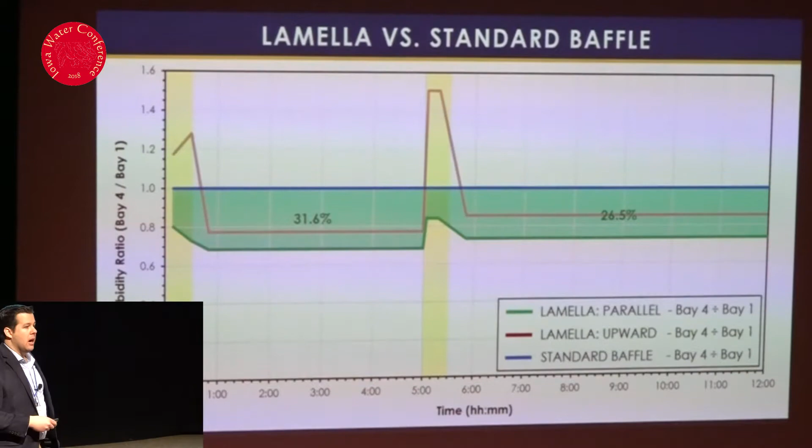We wanted to take it a step further. We realized that having that lamella system was kind of inconvenient -- it's expensive, it's difficult to install correctly, and it would be difficult to move from site to site.

It would take a large crane and a large truck to get them moved from different projects, so we wanted to see if we could come up with a different way of doing this and still get the same benefit. So what we did was we constructed a lamella settling tank that actually goes outside of the basin, so we realized we've got the advantage of using a skimmer.

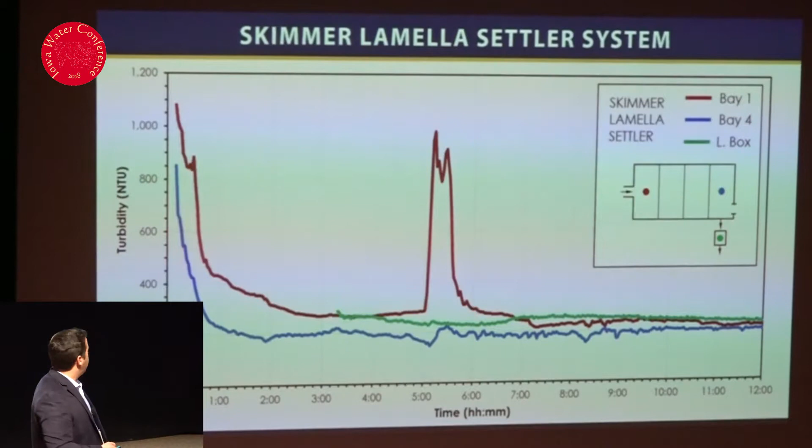We don't see a huge increase in treatment or decrease in turbidity. What we do see is there's no discharge. So for the first three hours of the test, you're not discharging any stormwater, which is where you see these large spikes in turbidity. There's a huge advantage there, where that first flush is cooled down and condensed in the basin before being discharged.

And this large spike you see here during our second test, our second storm event, is completely canceled out - it's a flat line during that event. So there's benefits there, where you get a predictable discharge turbidity rather than having all those fluctuations you'd have during those first flush type events.

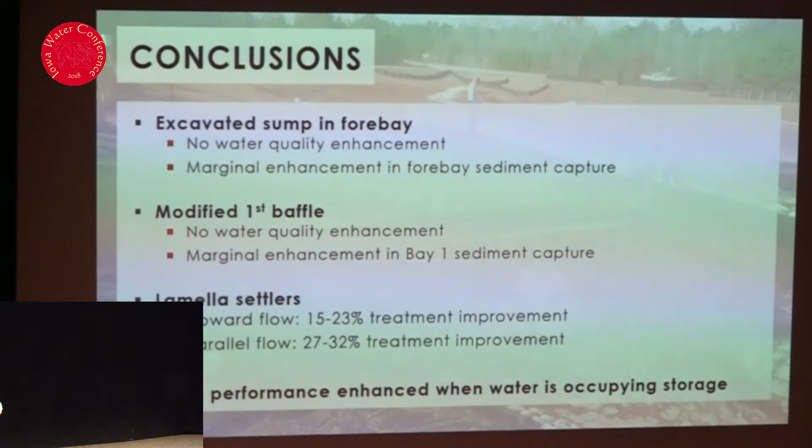To wrap things up with the sediment basin - I didn't talk about the forebay or the baffle, but we made some changes there that were beneficial. On the upward flow lamella settlers, up to 23% treatment improvement. Parallel flow lamella settlers, up to 32%. And we also realized that when there's dead storage occupying the basin, you have less resuspension, so there was benefit in having dead storage as well.

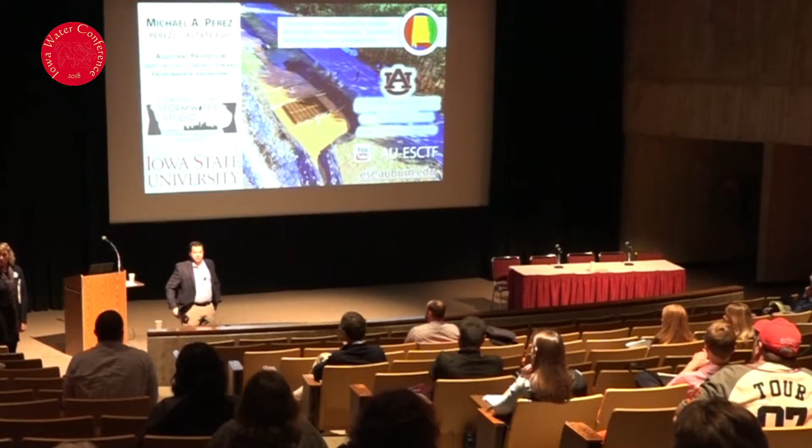So on each of your experiments on your website, they're documented, you list the specs of geotextiles used. Did you look at different geotextiles? Are they all equal, or do you find woven or non-woven outperform for different applications?

Yeah, so that's a good question. It all depends on what the DOT prefers as far as materials go. In our case, since we're working with the Alabama DOT, they wanted to see their materials tested, so a lot of the time we're relying on non-woven fabric, which is what they prefer. We did use woven for the Georgia comparison we made with the silt fence sediment barrier.

That was a little of where the question was going. Yeah, you're using standards that are already laid out, which all contractors are going to have to work under that framework unless we convince someone to change the standards. But I was just wondering if you had said, well, we think that maybe if you change the fabric or the material itself, or a different spec rating, you get higher efficiency. I didn't know if you altered the fabrics themselves.

No, beyond that test we didn't. And I guess what we took away from all these different studies was that it's not a function of filtration - it's not how much water can pass through a media, it's how much impoundment you get upstream. That impoundment is what creates the conditions where soil particles start to settle out through gravity. As long as you're not creating a situation where you'd have failure or flooding, which you'd have to manage as well, generally the larger the impoundment, the more water you can store, and the longer you can store it, the more treatment you get.